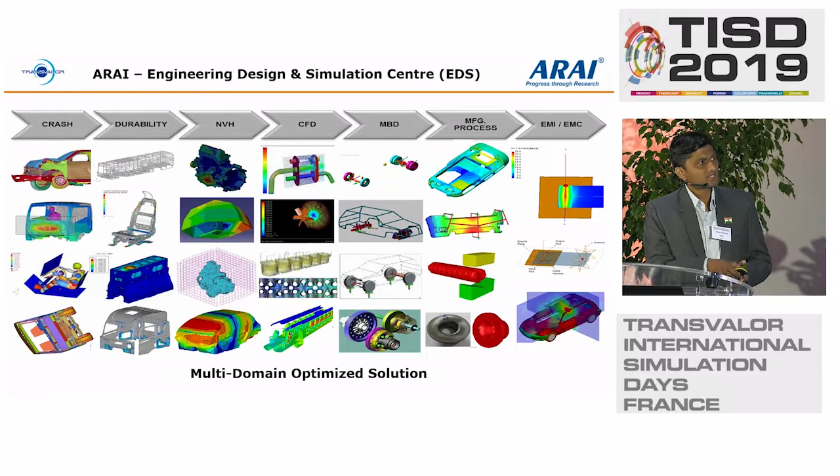In ARAI, I'm working in the EDS department. It's an engineering design and simulation service, and we simulate and provide services in various verticals, out of which you can see manufacturing process is here. Now let's move to our topic.

The frequent shop floor problems in the forging process are fill up, folds, laps, tool die wear and tool breakage, tonnage under usage or over usage, grain flow prediction, trimming process issues, and heat treatment issues. Out of which, tool wear is one of the major issues on which the study was carried out and will be demonstrated in further slides.

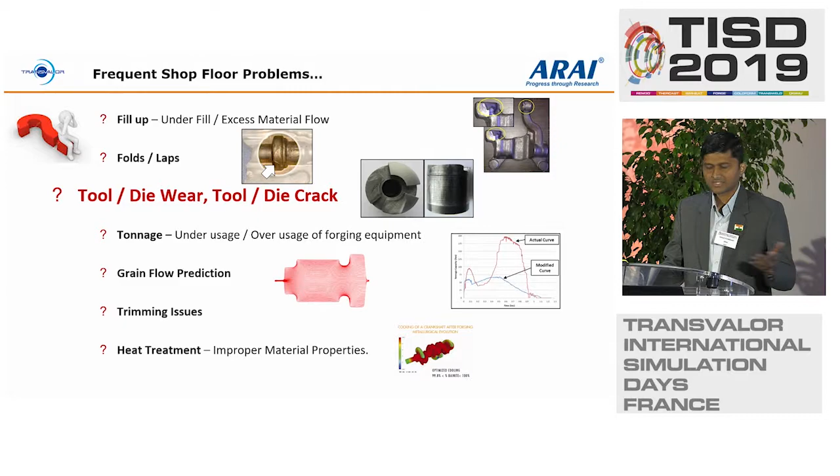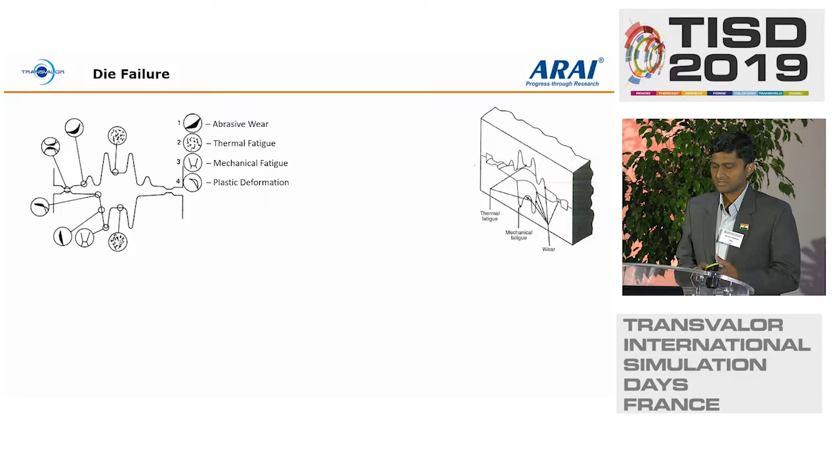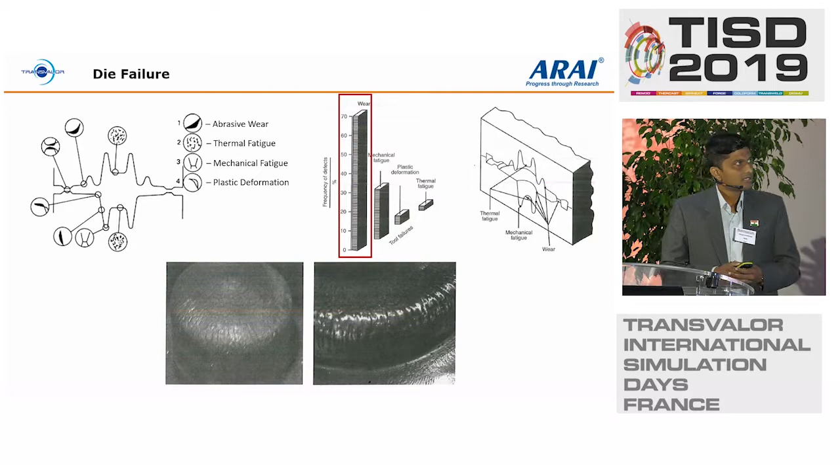Forging dies need to be replaced after a certain number of production cycles because of die failure, which occurs in any form: abrasive wear, thermal fatigue, mechanical fatigue, and plastic deformation. Out of which 70% of failure takes place because of abrasive or adhesive wear. So our research work was to predict that before going into the production cycle.

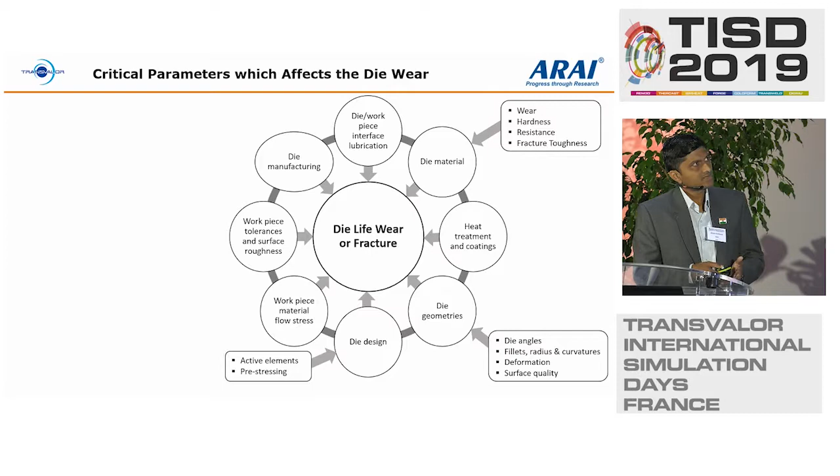So these are some of the critical parameters which are affecting the die wear. These are some of the process parameters which we have identified, in which tool design, die material, process parameters like temperature, then friction and workpiece material and other environmental and process conditions were also analyzed. Here, some of the significant parameters which can be quantified are highlighted with their level of influence.

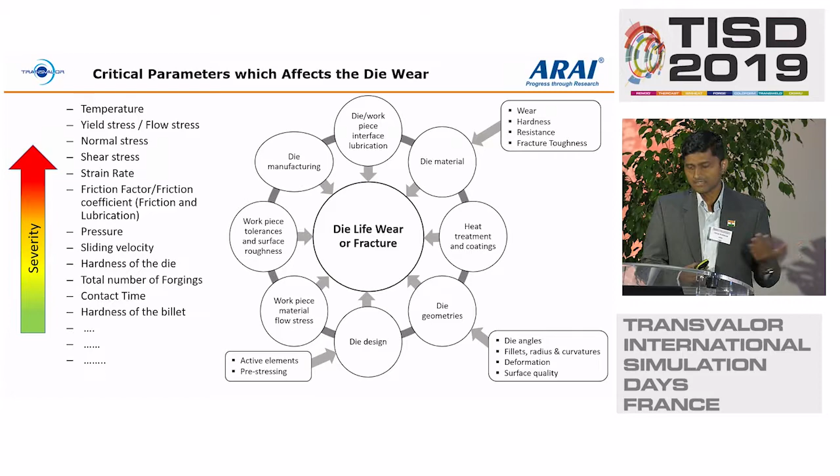So let's start. Before predicting, we need to take one component, and we have identified a critical component, a fork or a tube yoke, you can say. That component was modeled in the CAD software, we did its process simulation, and we made a forging process for this component. We have also analyzed that most of the material is flown into the cavity without forging defects. The optimized die cavity design was given for die manufacturing.

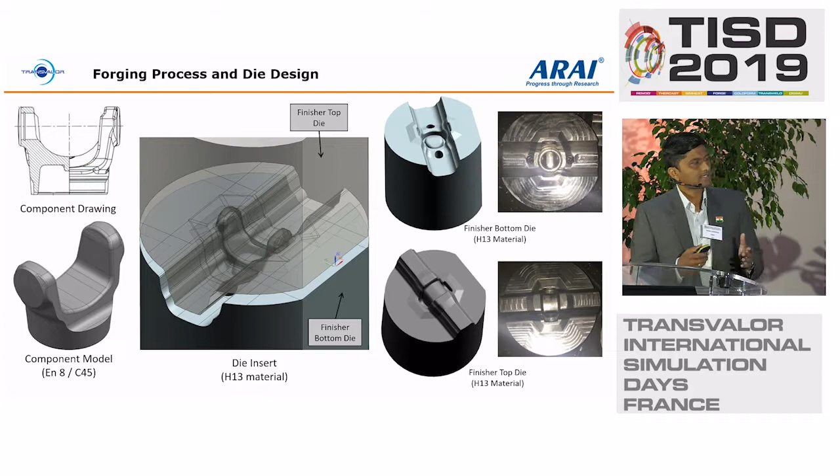As you can see, a die was manufactured, and suitable material was selected for the component and the die inserts, which is widely used in the industries. We have used C45 or EN8 for the component and H13 material for the dies. The forging process simulation was carried out for the designed components. You can see the animation for the blocker process and finisher process.

As you can see, this is actually a video. We have produced 5,000 components on a 250-ton mechanical press, which can be seen here. The sequence of the forged parts, the upsetting, then blocker and finisher component can be seen here.

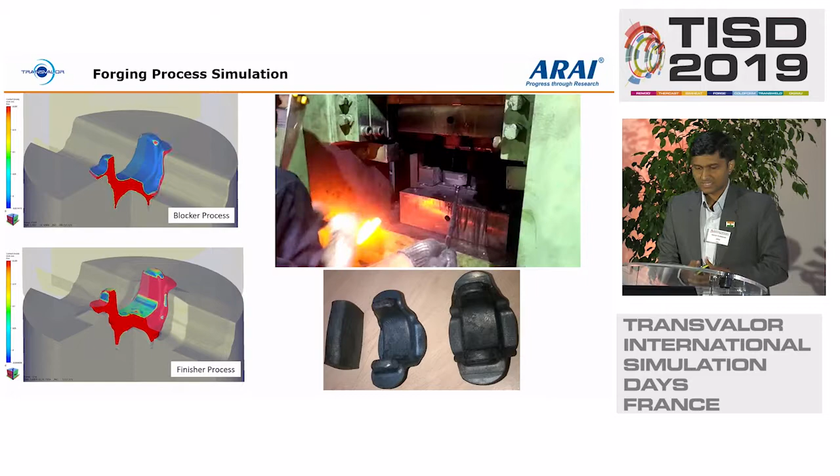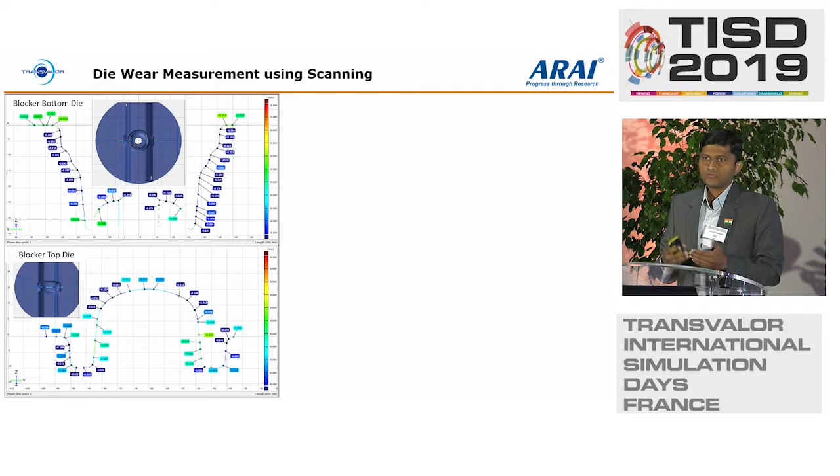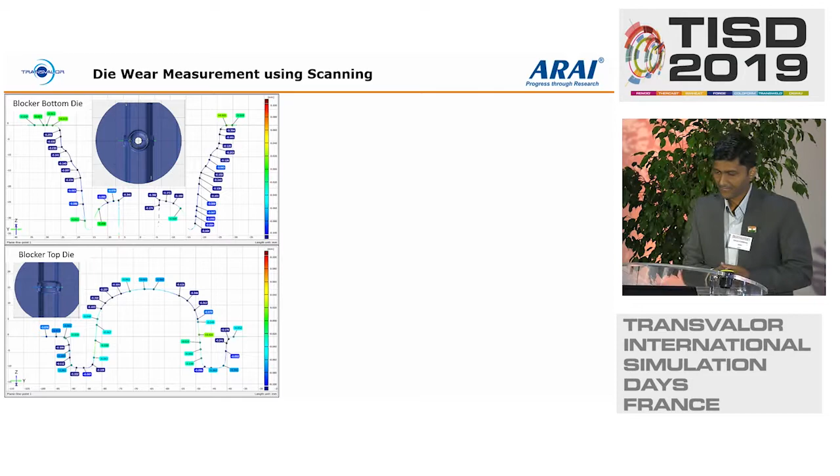The forging dies, which are going to wear, have to be physically measured. The die wear pattern has to be physically measured, which we have measured at frequent numbers of forging cycles with the help of 3D scanning equipment. These scan results were compared with the original scan, before going for production, overlapped and matched for the difference. Here you can see a scanned die was overlapped, and we have taken the cross section, and this is the result for the bottom die and the top die. So the maximum wear regions were identified on the top and bottom die.

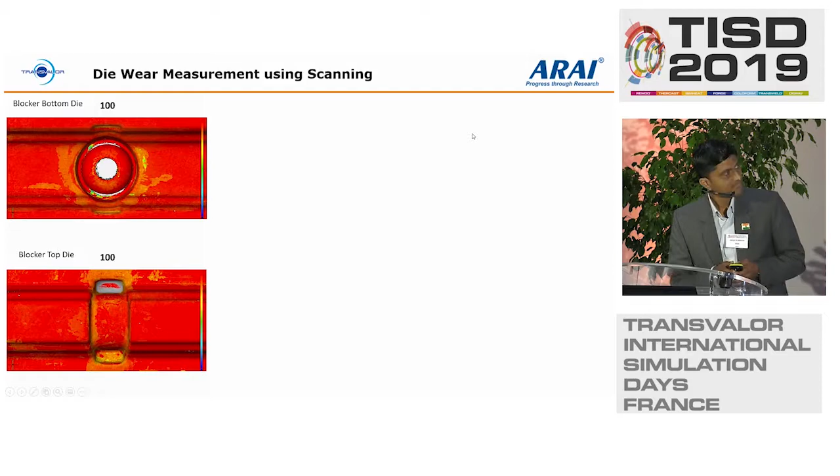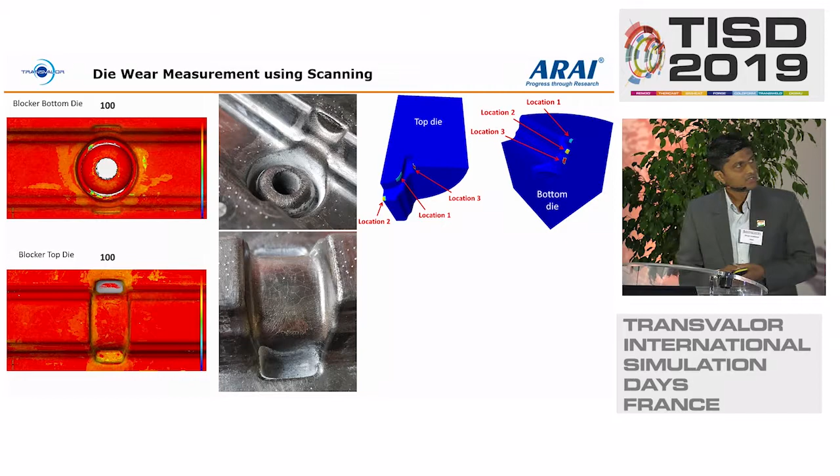So this is actually a video. Anyhow, you can see the wear pattern is at these regions here for the bottom, as well as for the top. Here is the maximum wear observed. So we have identified multiple locations on the die, 3 on the top and 3 on the bottom, for further study.

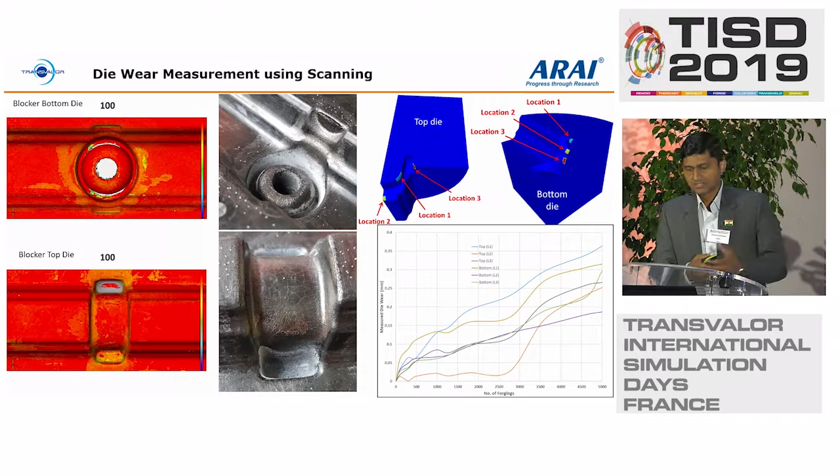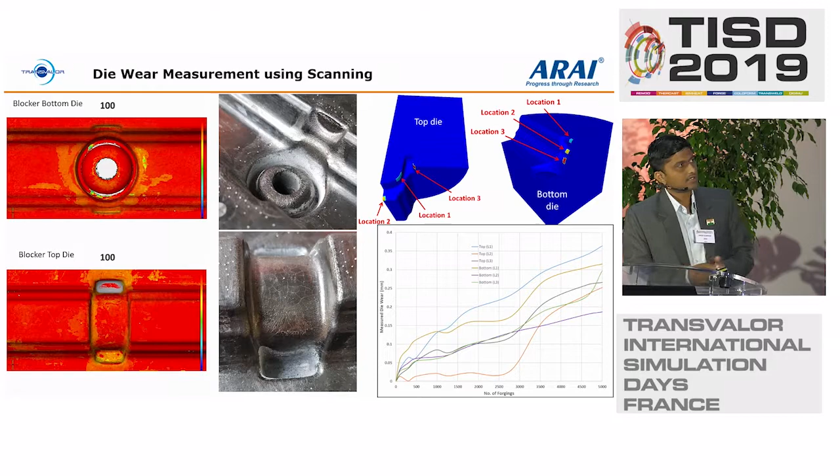The graphs on these regions were plotted, and the animation shows how wear takes place at the different regions of the cavity with respect to number of cycles. Here you can see the number of cycles, meaning number of forgings carried out, and how the wear is increasing on different regions. So in this study, we physically measured the wear, and now we need to correlate with the simulation software so that we can use that study for other components.

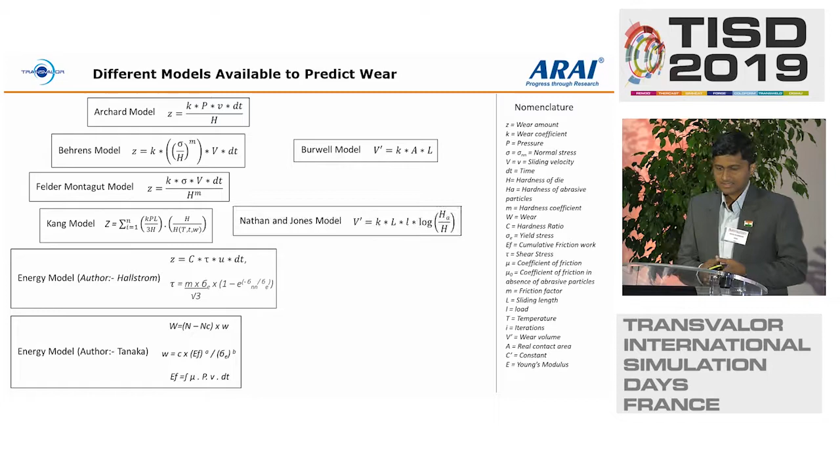In the literature, there are many wear models available, out of which a few are listed in the slides. Among these wear models, three traditional and one energy model were selected for further study, as highlighted in the slide.

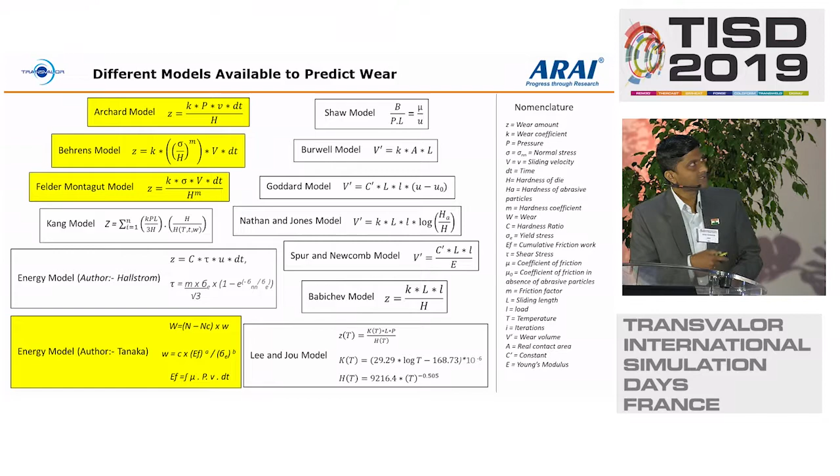Why am I telling the traditional? Because these are the Archard models, further modified by other authors. Now, first we will look at the traditional wear model. Here, the experimental forgings were done, scanning was done, and the wear calculation was predicted. So this part of the study was already over.

Now, the FEA simulation, in which the FEA analysis was done for the forging dies, in which steady and dynamic parameters were considered. Its simulation was done. Further, to predict the die wear, we have used the experimental wear as a reference for predicting the further die wear in the simulation.

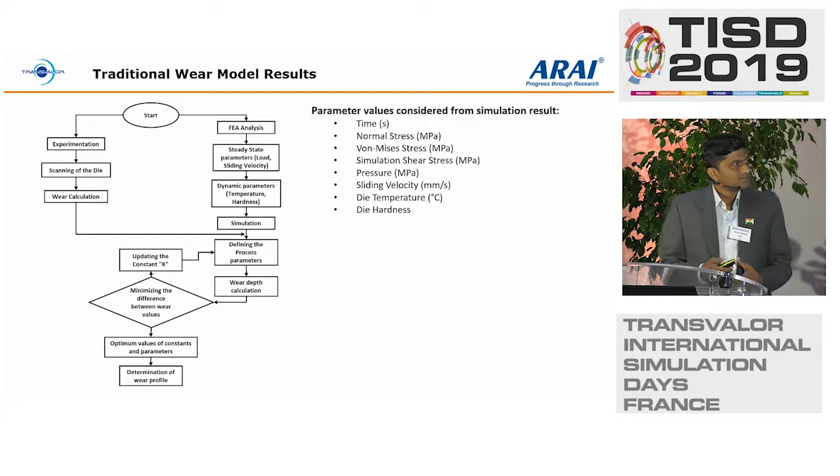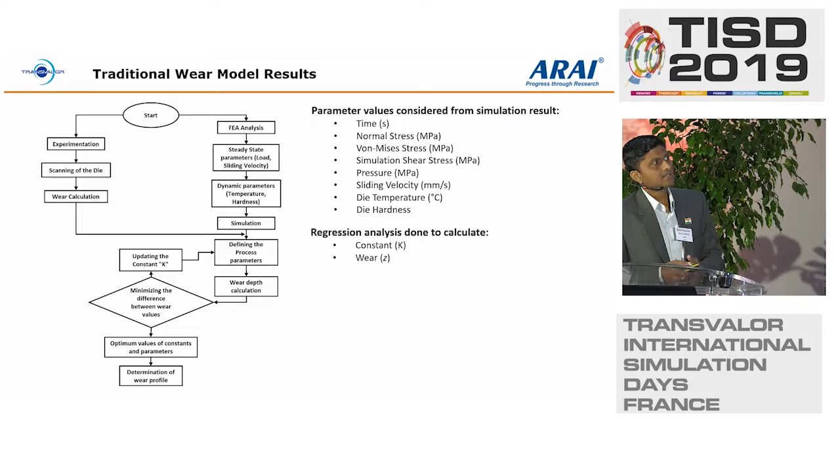Here you can see a loop to find the constants k. So these are some of the parameters which were used from the simulation results, and k and Z were analyzed using regression analysis. For these three models, more software coding was done in the simulation software, and further analysis was done.

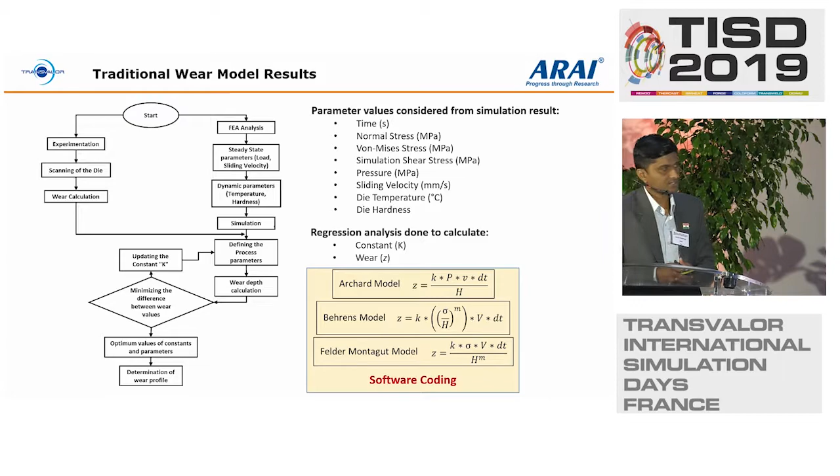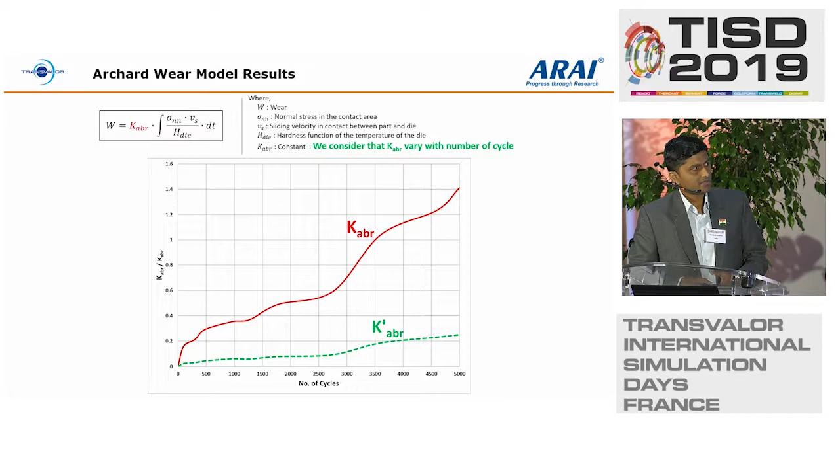So let's see the Archard wear model result. Here the K constant, K abrasive, is increasing with respect to the number of forging cycles. And with this K value, you could see the simulation result and the scanned wear value have an error, because K is directly proportional to the wear. So we did one more iteration to fine tune the K constant, and you can see K dash ABR is calculated, and with this the wear value is predicted.

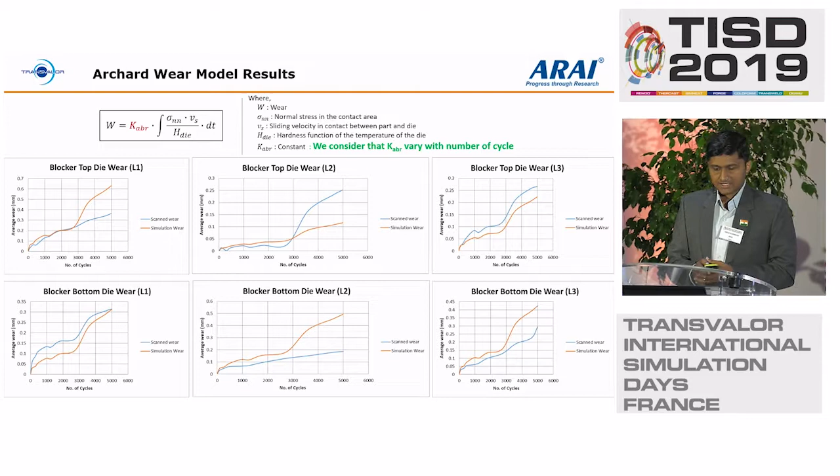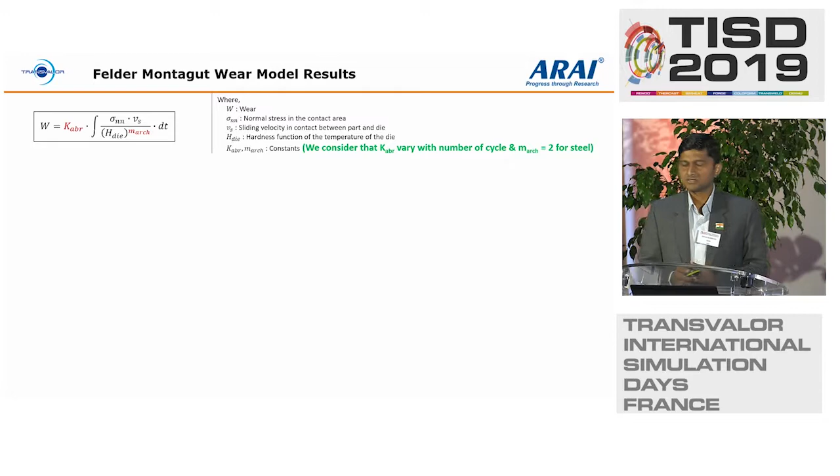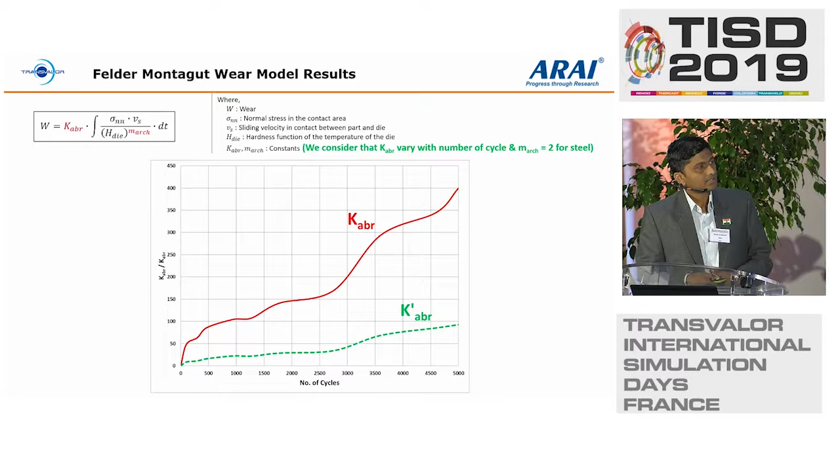This is one traditional wear model. Now let's see the Felder Montagut wear model. Here one more parameter was added, m arch, which is a constant, and we have considered 2 for steel. Here the same K abrasive is also increasing with respect to the number of cycles, and here is the result in which you can see a major difference. So we have further modified and iterated, and we got the K dash ABR, abrasive K factor, and you can see the difference between the scanned and the simulation wear was reduced.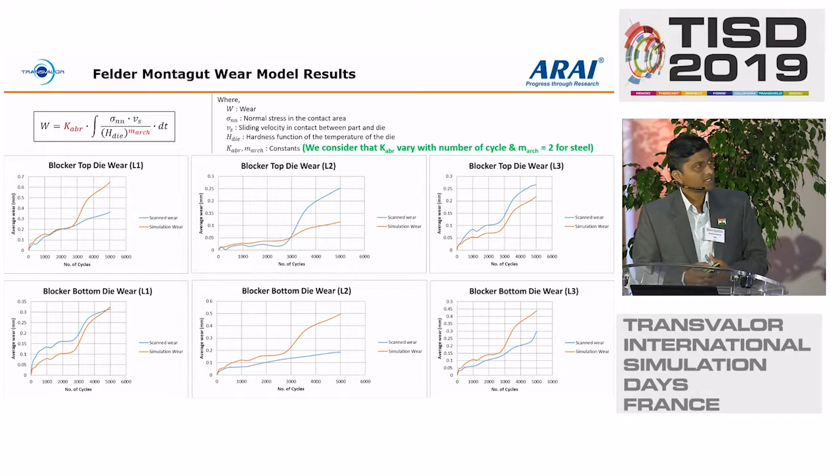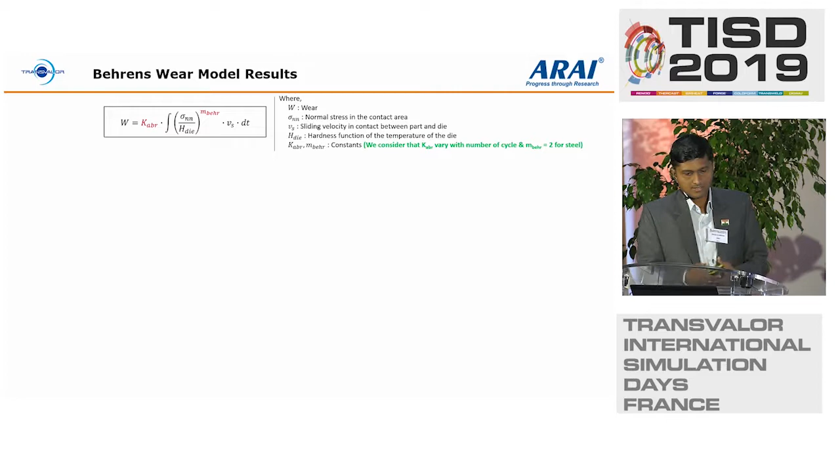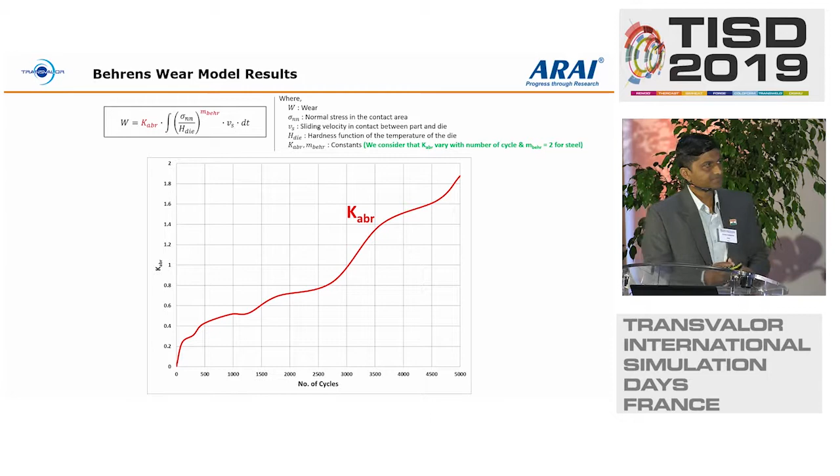For Behrens, the formula is changed. The K Behrens is at the top. Sorry, M. So here also the K value is changing with respect to the number of cycles, and the wear value also has a difference between the scanned and the simulation wear. So we have further modified the K ABR, and we were able to achieve some portion of the wear patterns.

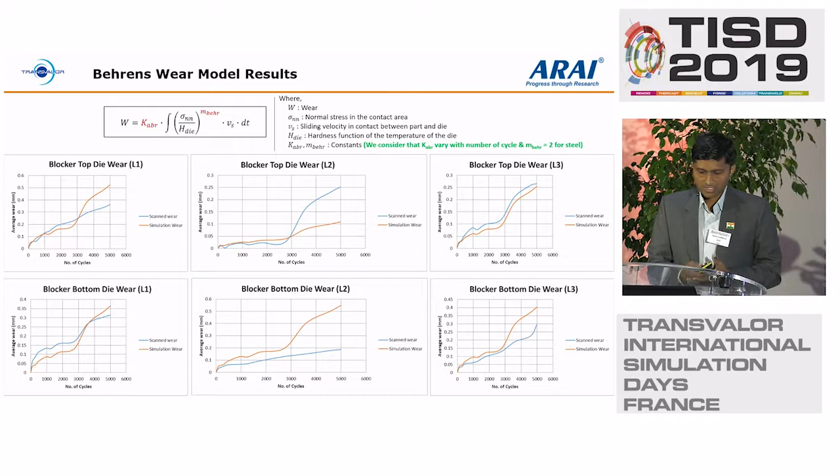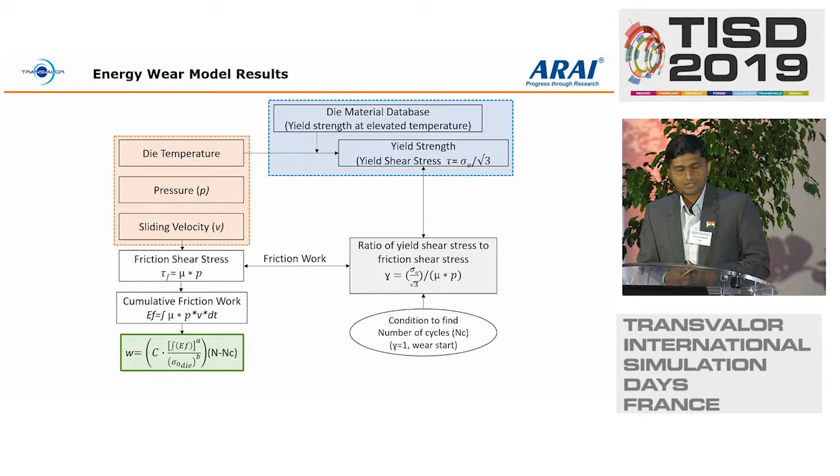In this traditional model, we have not used the number of cycles. We cannot predict the number of cycles, but in one more model, the energy wear model, the number of cycles was considered in the calculations to predict the wear pattern after n number of cycles. So these are the wear formulas for the energy wear, in which the material property itself is considered for calculation, along with pressure, sliding velocity and temperature.

So this ratio gamma, yield shear stress to friction shear stress, is a factor to predict the die wear start after n number of cycles. So the energy wear model mostly depends on the die material property along with a few process parameters. The ratio of yield shear stress and friction shear stress helps find the number of cycles at which wear starts. This data further helps find the wear value after a number of forging cycles.

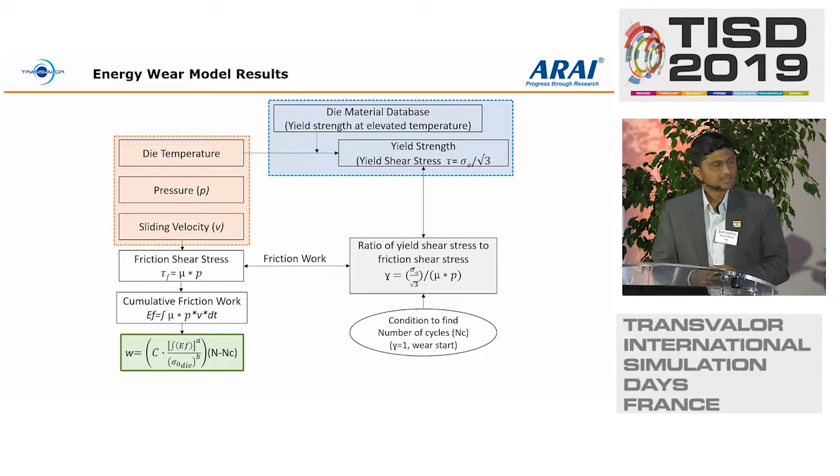So for the energy wear model, the hot forging process was already designed. Further, we set the tool target as n cycles, and then we simulated. With this we identified the friction shear and cumulative friction work to remove material from the die, which is called wear, and the calculated yield shear stress was further used to calculate NC and W, meaning wear.

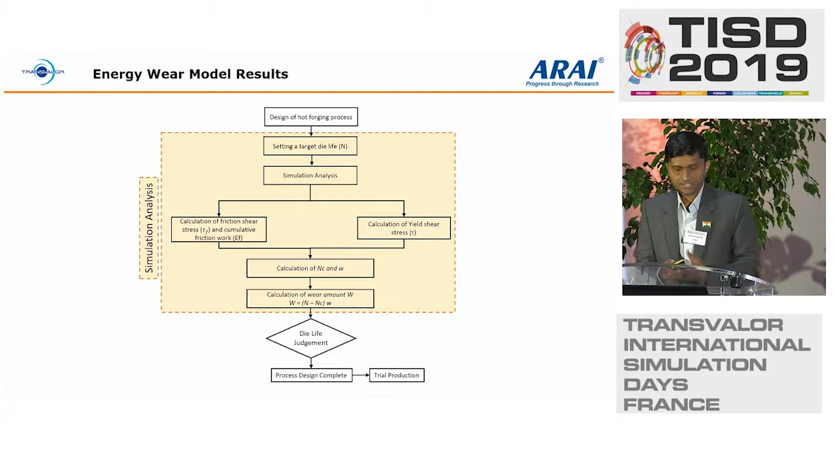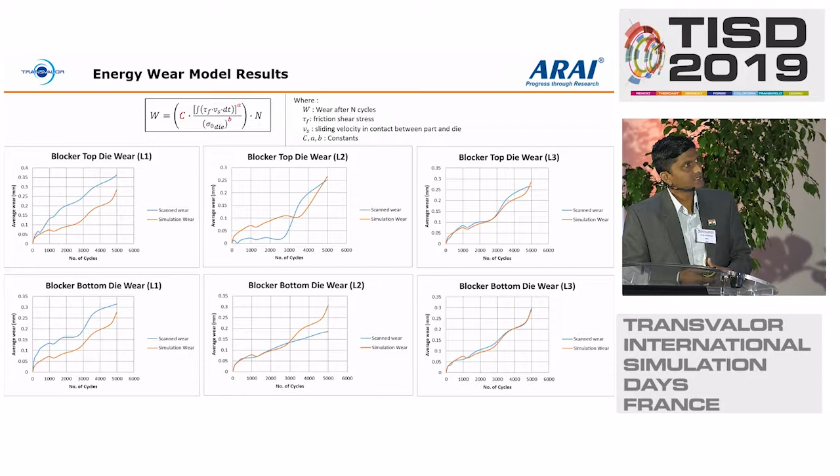So this whole process, the whole square section, was simulated in the software in a single iteration. So if you see the wear result, in a single click or single iteration, we were able to achieve results as per the scanned wear. Here you can see A, B and C are the constants, which are easily calculated using material properties and other simulation results.

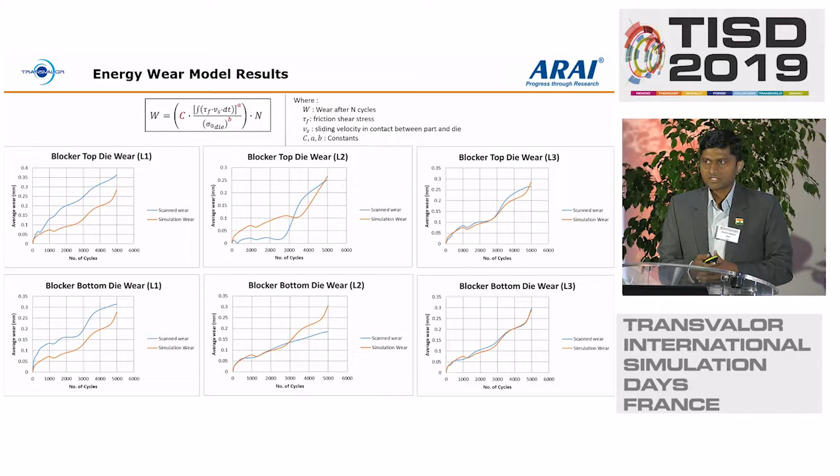So with this, production of 5,000 components was carried out and die scanning was conducted at intermediate numbers of cycles. Abrasive wear patterns can be seen on the blocker and finisher forging dies. The parameters derived from simulation results were used as input for calculating the constants K, A, B and C in the different wear models. The software coding was modeled and incorporated in the FORGE software NxT 2.0 and 3.0.

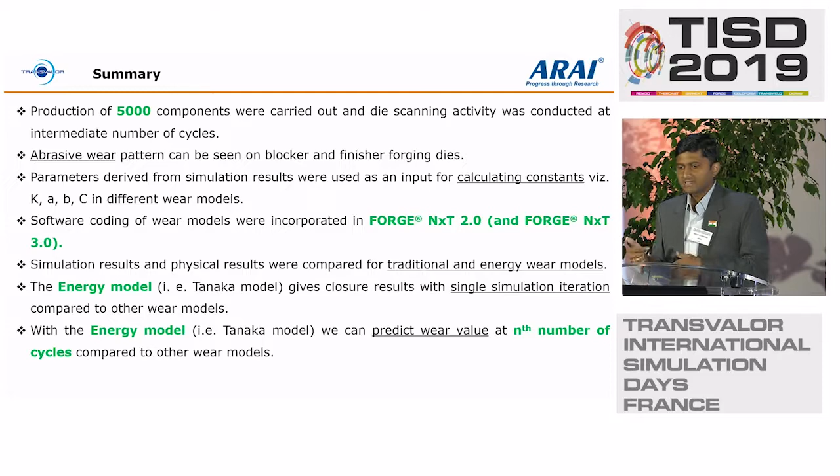The simulation results and physical wear results were compared for the traditional as well as the energy wear models. The energy model gives a closer result with a single simulation iteration compared with the other wear models. And with the energy model, we can predict the die wear at n number of cycles, compared with the other wear models.